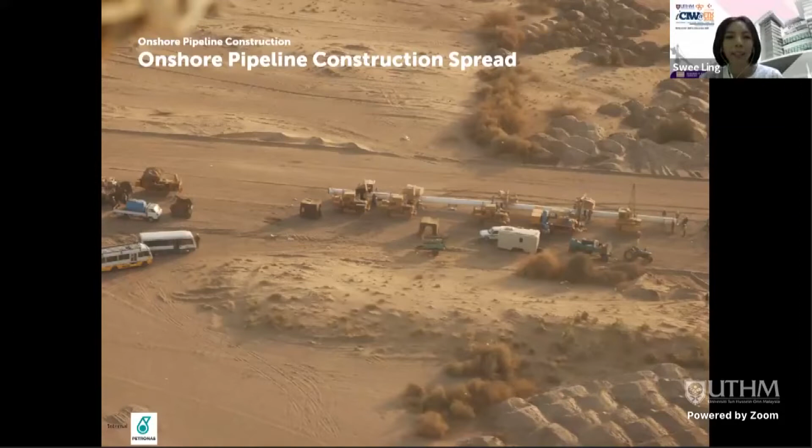Let's go through the construction spread. The typical pipeline spread consists of a few sections, starting with pipeline survey. In order to install a pipeline, we need to conduct a detailed survey on the site so that we will avoid encroachment into private land. If the land does not belong to us, the land acquisition process needs to be started, so the beginning of the activity might take a long time until all land matters are settled, then everything will follow as per plan.

My colleague will go in detail for each activity later. After clearing the site and getting the correct work boundary, we start clearing the site and perform removal of the ground surface, including rock and plants. After that, pipeline will be strung along the right of way, and then welding is done for each location.

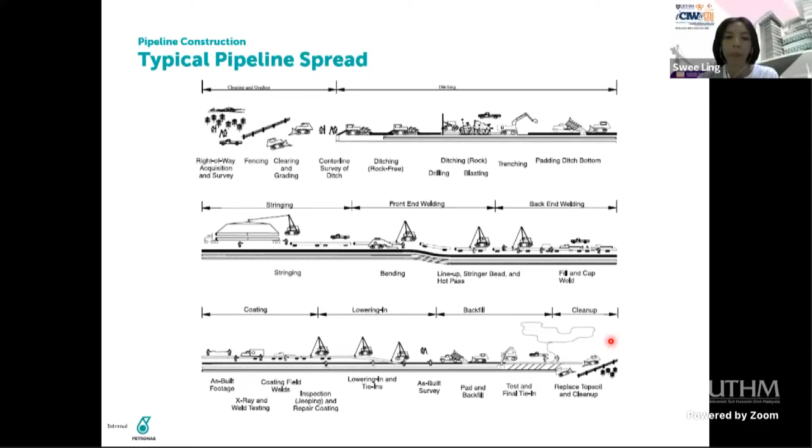This is some of the spread for countryside construction. Countryside is normally straightforward because it does not have much buildings or underground structures that we need to reconsider in the routing of the pipeline, so after clearing the site and installing the pipeline, the reinstatement activity is much easier compared to the urban area.

For countryside areas, most construction is in places with less people. During pipeline installation or design, we need to consider what we call location class with different design information, which affects our design and construction method. Okay, just stop me if there are any questions.

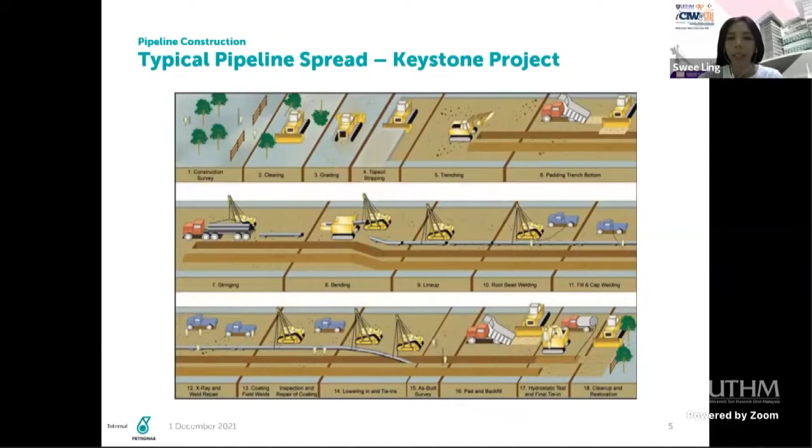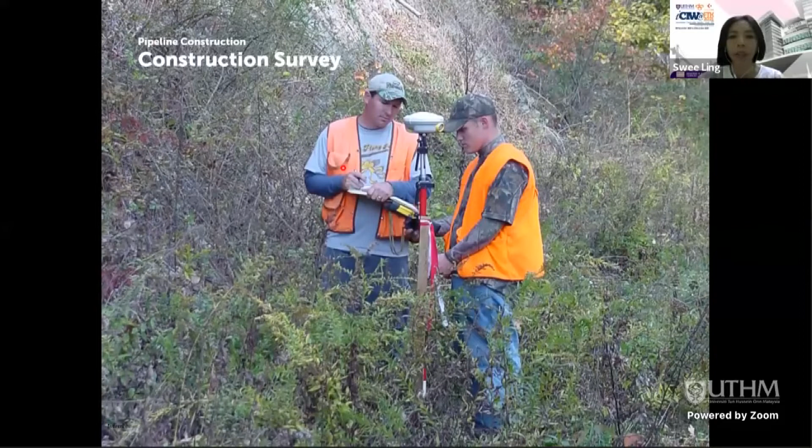I will go to our first activity in pipeline construction, which is to conduct the construction survey. This equipment is very familiar to the civil team, the theodolite, as we studied previously in university. We also use this equipment to conduct leveling. A construction survey is performed to gather detailed information to enable the design team to complete the design of all sections of the pipeline, including the road.

We need to make sure to identify the boundary of the right of way and the work site location. This activity includes brush cutting of the center line and the cross section offset of sufficient width to provide a clear line of sight for the surveyor.

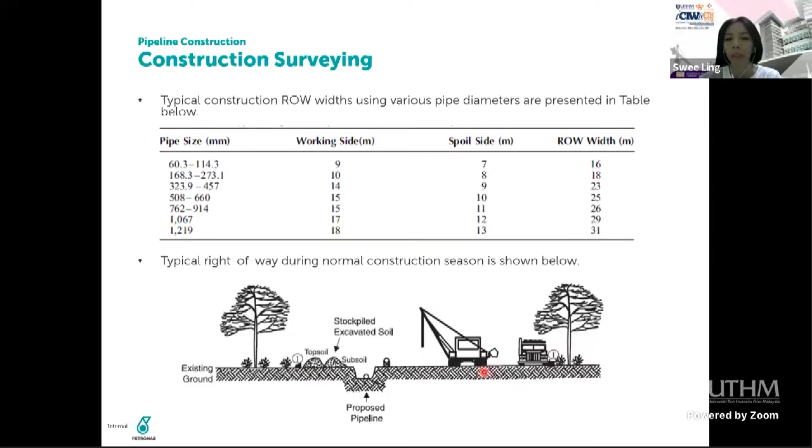So next is about a typical construction right of way width that we adopt during pipeline construction, so that the people performing the construction have clear sight of all activity. From the small picture, at the left side is where we stock the excavated soil, and at the right side is where the activity takes place to perform pipeline stringing and all the welding.

So what is right of way? Right of way is the width, the space of land allocated from the center line of the pipe, so that the operator can perform construction, and then in future when the pipeline is in operation, the operator can perform maintenance and inspection.

The area of the right of way, all the temporary working space, and all the access routes used for construction are completely clear of tree and brush during this phase. Stumps are removed from the ditch line, spoil storage areas, and all areas to be graded. Logs are salvaged wherever possible, and the bulldozer with special attachment cuts or knocks down any remaining material.

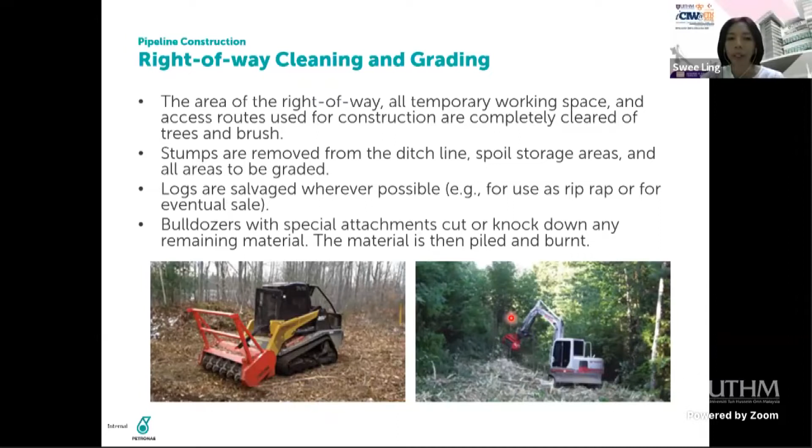After the cleaning and grading activity, the inspection staff will check that the permanent right of way or temporary work area boundaries are clearly marked by the inspector, and that cleaning is confined within these boundaries. The temporary land use agreements are executed prior to cleaning the right of way and comply with each specific provision.

For all those utilities, let's say we perform the installation in an urban area, those exposed utilities will be marked and protected, and we also need to ensure that drainage affected during construction is reinstated and not blocked. Timber, debris, and earth are not placed in the watercourse, and sufficient area is cleared to ensure that slash and debris is not mixed with the ditch or grade spoil, and that spoil is not placed on uncleared ground.

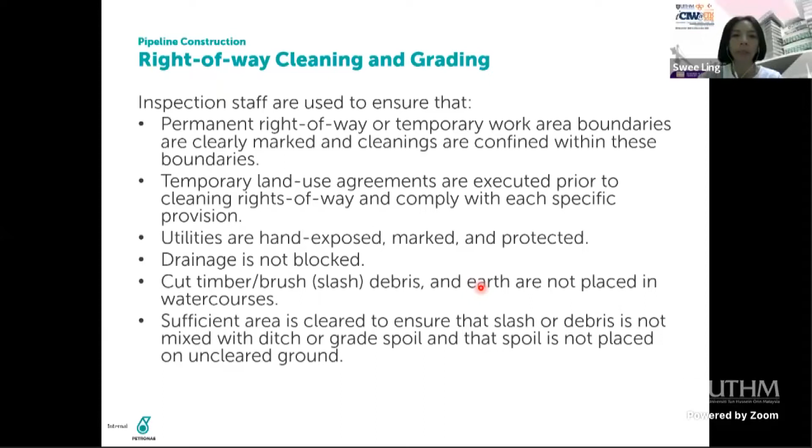That's all for my sharing on the construction survey and the right of way preparations. I would like to pass the slide to my colleague, Puan Salwanie, to continue with the sharing.

All right, thank you, Ms. Ling. So I will proceed on the trenching, pipe stringing, pipe bending, and field joint coatings. Okay, next, Ling.

All right, so we proceed with trenching. Normally the trenching will be excavated using the wheel digger, supplemented by the backhoe to dig the sag bends and areas requiring extra depth. Usually our pipeline is laid along about 100 kilometers, so it would be time consuming if we used manual digging or backhoe. That's why we use the wheel digger to proceed with the trenching activity.

For the spoil from the ditching activity, usually we will stock adjacent to the trench, as shown in the previous slide by Ms. Ling earlier, so that it will ease our activity for backfilling later. The topsoil will be put along the excavated area, and the finished ditching will be to the correct depth and width to suit the pipe diameter. Usually the trench dimensions will vary according to our pipeline diameter or the nature of the terrain where we will lay our pipeline.

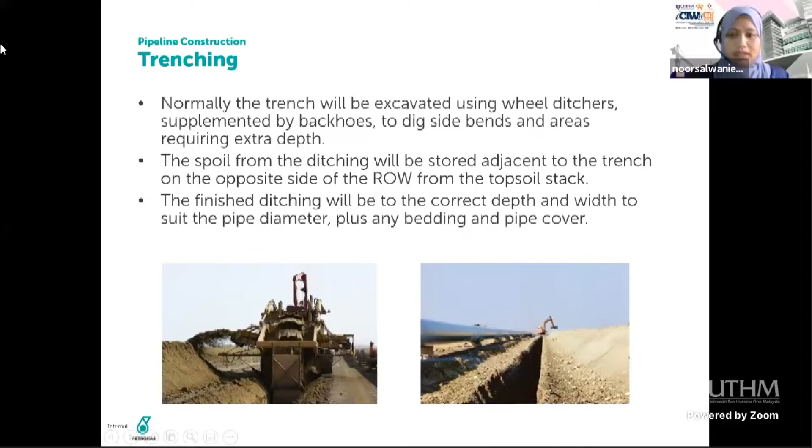Okay, so next. This is, as I mentioned earlier, the trenching equipment. We use trenching machine or the wheel ditcher because it is suitable for long distance and flat terrains, as well as high efficiency rates during construction.

We also use the pipeline padding machine, using the in situ earth that we excavated earlier. After that, we start to remove debris from the excavated soil, and later put it as a coating for additional protection to our pipeline to avoid damage to the coating. This padding is to reduce premature pipeline corrosion and improve pipeline longevity throughout our operation life.

So what does the inspector monitor during the trenching process? We need to ensure correct dimensions, such as the depth mentioned earlier, to avoid contact with other pipelines and intrusion by third parties, as well as ensure spoil is placed separately from topsoil on the strip ground, proper sloping, and hand trenching near buried facilities to avoid potential damage to our utility or pipeline. We also ensure proper alignment of the trench, with gaps or plugs to allow landowner, livestock and wildlife crossing, and ensure drainage is not blocked during construction.

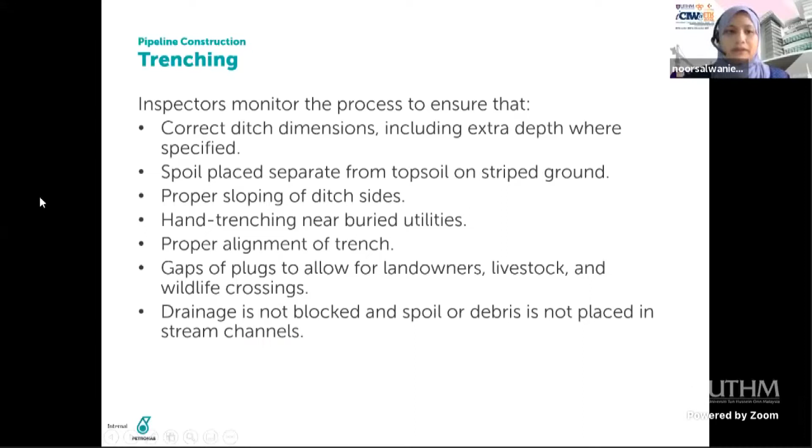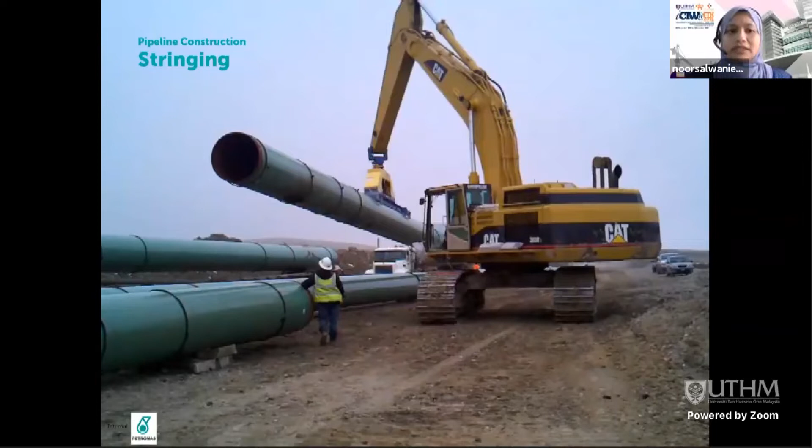After the trenching is completed, the next process is pipeline stringing. So what is pipeline stringing? It's the process where we deliver the line pipe and align it along the excavated trench area.

Upon completion of the trench activity, the line pipe is delivered to the site. We use a crane to lift and load the line pipe from the truck, then align it side by side along the trenches. The pipes are angled slightly to allow the end hooks to be removed and to prevent damage to the bevel, since the bevel will later be used for welding between the line pipes along the trench.

During the stringing process, a site supervisor needs to monitor the site to ensure the pipeline is handled properly so it won't cause damage, so that later we can weld the line pipes to one another perfectly.

We also need to ensure the different pipe wall thickness and grade marking match the alignment sheet, because our onshore pipeline construction is based on class category - for example, class 4 areas with high population density require higher thickness material. So we need to properly align and allocate our line pipe during stringing according to the wall thickness or grade of the pipeline.

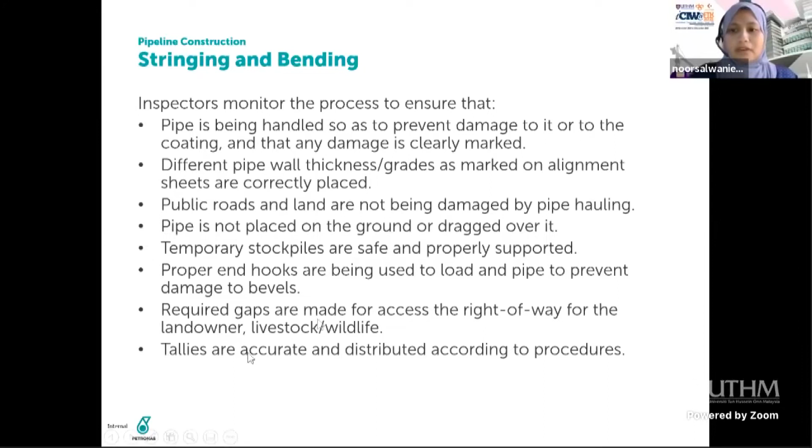After aligning all the pipeline along the trenches, the next process is pipe bending. There are three categories: cold bend, hot induction bend, or elastic bending.

Why do we do pipe bending? Because most of our pipeline route is not straight, due to the nature of the terrain - for example, if we lay pipeline in a mountainous area, there may be elevation changes requiring us to align the pipeline accordingly. Hence we must perform pipe bending so it fits properly into the 3D profile of the trench we excavated earlier.

Usually the pipe joints are welded to one another before we perform the pipe bend. Based on our experience and the projects we've conducted, most pipe bends are done on-site using a cold bending machine.

However, cold bending is not suitable for sharp bends, so it's usually applied at 40 D radius or above. So based on the pipeline construction survey we conducted earlier, if our pipeline route has a sharp bend, for example less than 40 D radius, we will require pipe bending using hot bending.

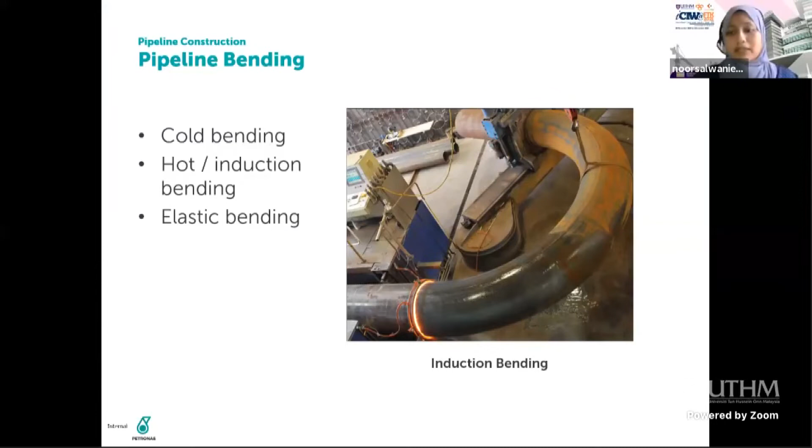The last one is the elastic bend. For any sharp or small bend, or any pipeline bending, we need to follow the requirements as per ASME B31.8 or ASME B31.4.

After we have performed the pipe bending, we align our pipeline at the trenches, weld our pipe together, and perform the pipe bending at the location where it needs to fit as per pipeline alignment. So the next step is the field joint coating.

Field joint coating is for the bare part of the pipeline surrounding the weld area. Usually our line pipe is around 12 meters long for each piece, so we need to join them together to make a long pipeline. The area where we join the line pipe is usually bare metal.

The other part of the pipeline is already coated with multiple types of coating depending on our application. For the areas where we performed welding to connect the line pipe, we apply the field joint coating. This is to reduce corrosion post-construction or during the operation life of our pipeline.

We apply the field joint coating, usually multiple layers of a certain thickness based on our product, to ensure the whole length of our pipeline is fully protected. There are multiple types of field joint coating, for example FBE type, dual layer FBE type, PUF, and SPU. The type we use depends on our application and the intention of the pipeline.

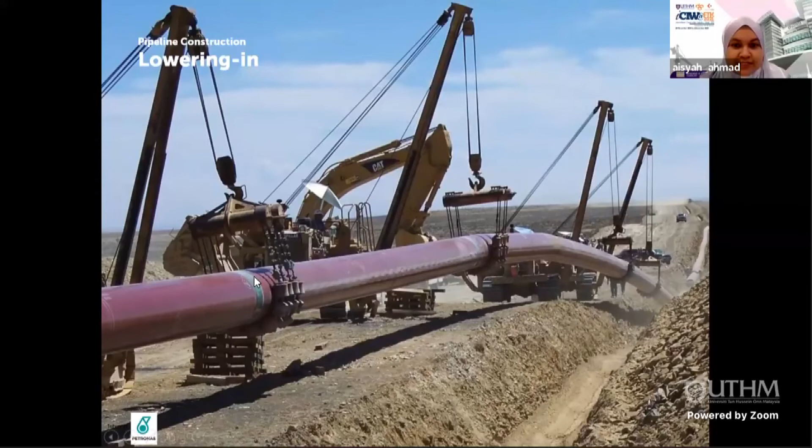As I mentioned, the lowering in activity means we are lowering down the connected pipelines using side booms, with several side booms working together for a smooth process. After lowering it down, we need to ensure our coating is still intact, so we re-inspect it using a holiday detector, and apply repairs if necessary. We use two types of equipment, cradles and belts, for lowering down the pipeline, depending on the length of the section and the terrain.

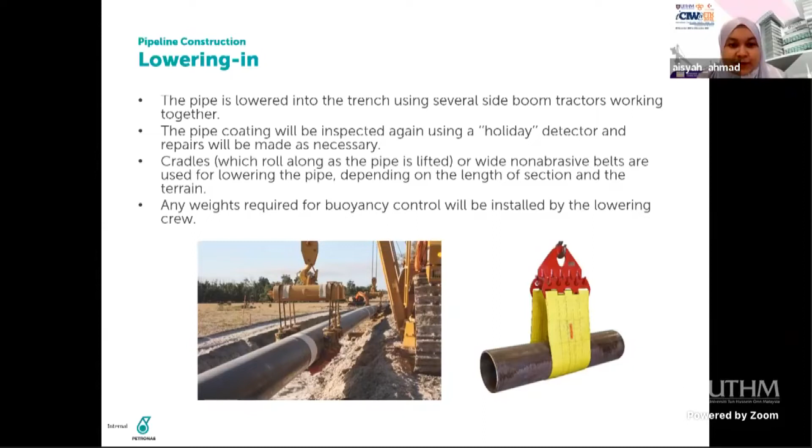Any weights for buoyancy control will be installed by the lowering crew. Sometimes when we have a high water table in that area, we would require buoyancy control measures, such as installing concrete mattress or culverts or something like that. Any weights will be installed during this time after we have inspected the coating condition as well as when we have lowered down the pipeline itself.

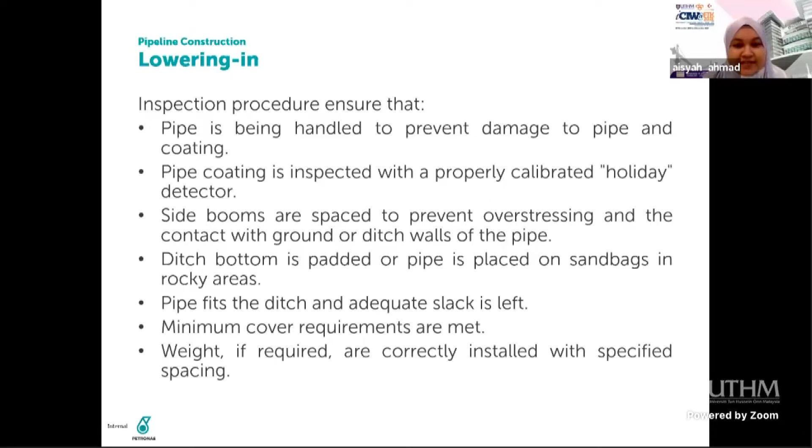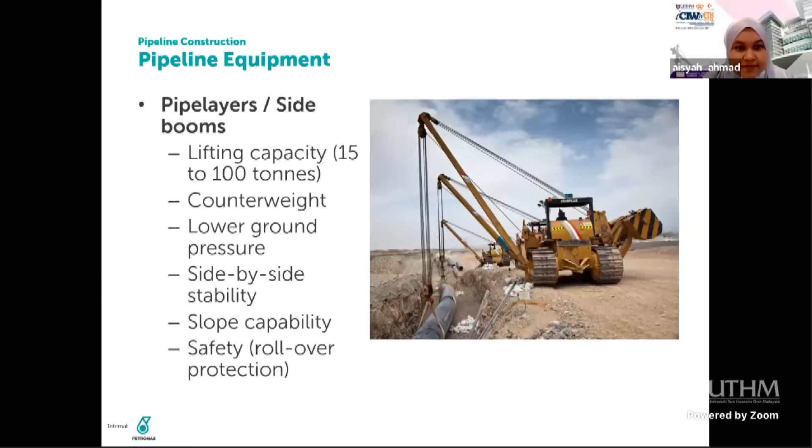The term tie-in means that we are connecting the pipeline into a facility or to another pipeline system, or it could be that we have two construction spreads and we would like to connect the different sections of a single pipeline. So we have some preparatory work, which is quite detailed. We prepare the hole, the bell hole itself, and install the skids to ensure that our trench is stable. We lower down our pipe ends into the trench, supported on the skid itself, then prepare our equipment and pipeline.

Another consideration during the tie-in is that we have a stable location, as well as no water around, in order for us to proceed with the welding activities. So stabilization and dewatering is part of the activities we usually conduct for welding inside the trench.

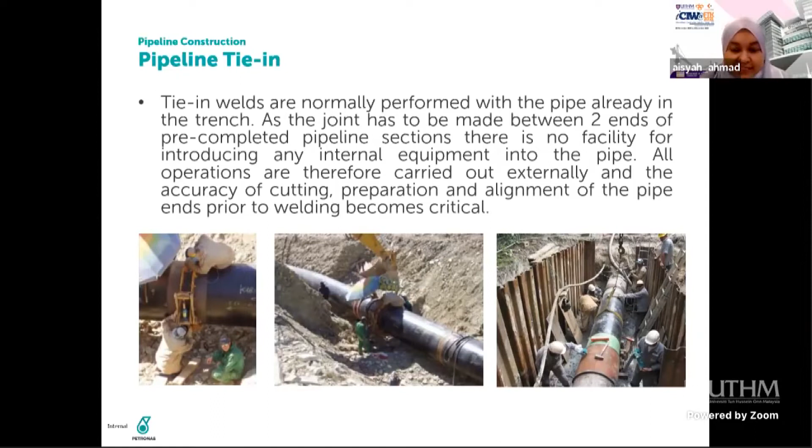The pipeline tie-in inspectors will monitor to ensure that welding is done by qualified welders as per requirement. The pipe is handled to prevent damage to the pipe and coating. This is a common theme throughout our construction activities. Pipe is aligned and welded without excessive force, meaning that sometimes when we put the pipeline inside the trench, we cannot align it together due to obstacles at site or the terrain itself. We need to ensure that the pipeline is aligned. That's where the challenges usually are when constructing the pipeline.

For complete welds, to ensure the welding is okay, we usually use radiography on the completed welds, and we need to ensure there are no defects in the welding, which need to be approved prior to backfilling. All the weld areas are coated. This is where field joint coating activities come in, and we need to ensure the exposed pipeline coating is okay, because external coating is the main protection against external corrosion. For oil and gas pipelines we use carbon steel, which is quite susceptible to corrosion, so we need to ensure the external coating is not damaged even before we use it.

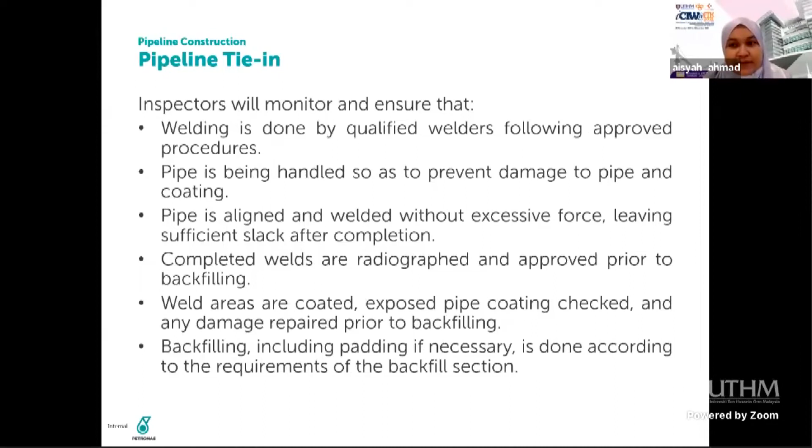We need to ensure there is adequate natural drainage, to ensure there is no damage or water table issues that could lead to geohazard problems later.

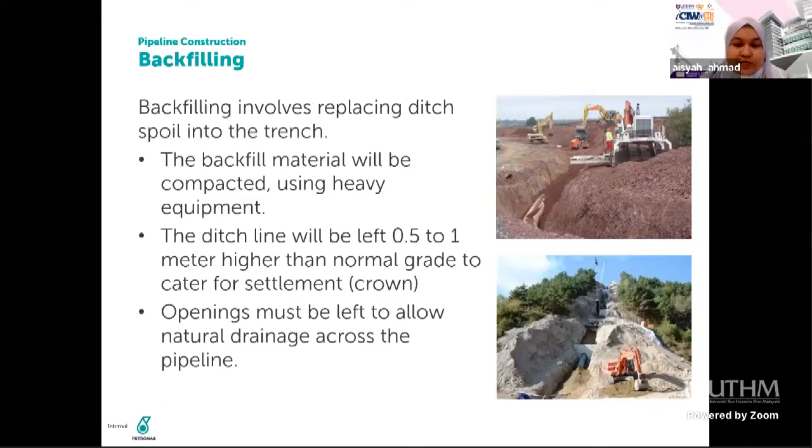Our specification for backfilling, the most common requirement by local authorities, is that we need to restore the excavated area back to the pre-existing condition. That is the minimum requirement, so we need to fulfill the requirements indicated in the plans or specifications, because different authorities have different requirements on backfilling, but usually we understand we need to restore it to the pre-existing condition. The backfilling shall be accomplished using suitable materials, meaning we need to ensure the materials used are not harmful or damaging to the pipeline and its coating.

It is defined as mineral soil reasonably free of materials that may damage the pipe installation, prevent thorough compaction, and increase risk of settlement. We need to carefully place the backfilling materials and ensure a relatively uniform spread all over the pipeline, in order to provide simultaneous support on both sides of the pipeline. All surplus or waste material remaining after completion shall be disposed of as per usual construction methodology.

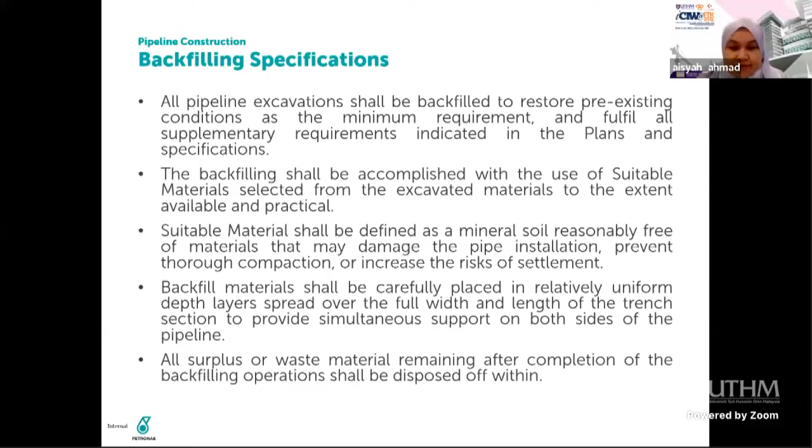Pipeline construction and maintenance is a highly regulated, strictly monitored practice with continuous involvement from federal, state, and local entities, as well as Tennessee Gas engineers and safety experts. The construction process begins with land survey crews marking the construction corridor, center line of the pipeline, utilities, road crossings, and other environmental areas of consideration. The construction corridor will then be cleared and graded to remove brush, trees, roots, and other obstructions such as large rocks and stumps. The corridor will be graded to provide a level surface and safe working area for the pipeline crews to build and install the pipe.

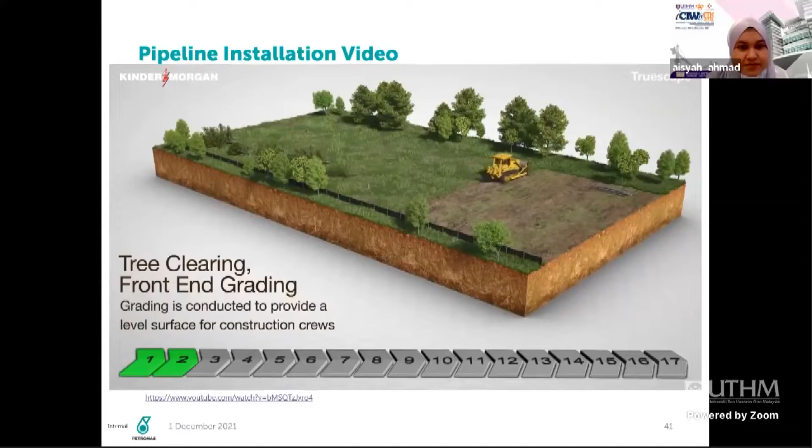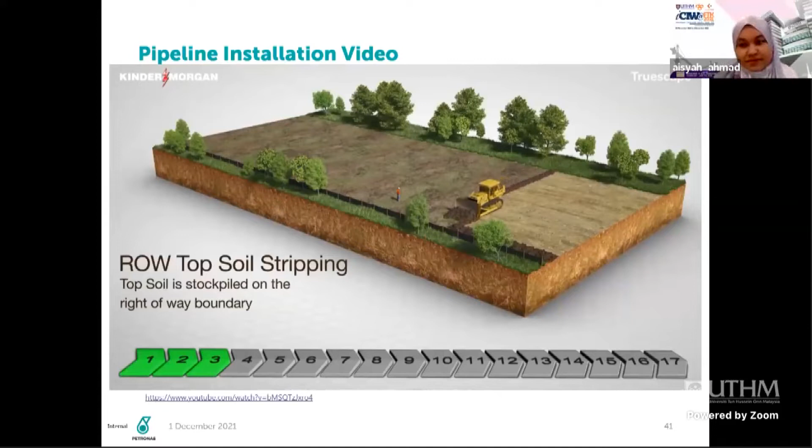The process of grading the corridor may require blasting rock ledge to accomplish a safe working area. The topsoil will be removed and segregated along the working corridor for use during restoration. The center line of the pipeline is then staked in preparation of trenching along the pipeline corridor.

In areas characterized by normal soils, the trench for the pipeline is excavated by crawler-mounted rotary wheel type trenching machines, or track-mounted excavators. The trench width and depth will be in accordance with U.S. DOT regulations. The excavated ditch bottom in areas of rocky soil conditions will be padded with clean soil to protect the pipe coating during installation.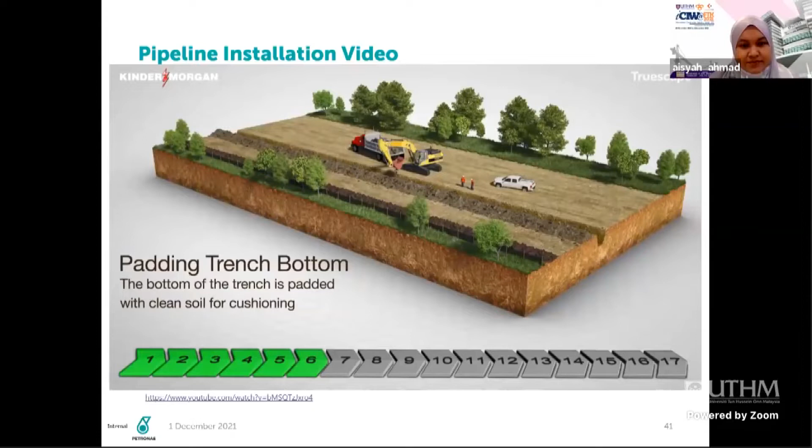Pipe will be delivered to the pipeline storage areas and will be placed along the right-of-way in a continuous line in preparation of welding operations.

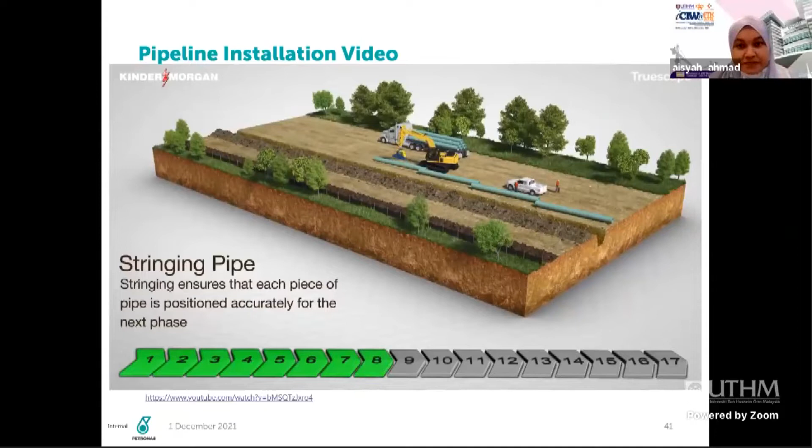Bending of the pipe will be required to allow the pipeline to follow the natural grade changes and direction changes of the right-of-way. Selected joints will be field bent by track-mounted hydraulic bending machines. For larger horizontal changes of direction, manufactured induction bends may be used.

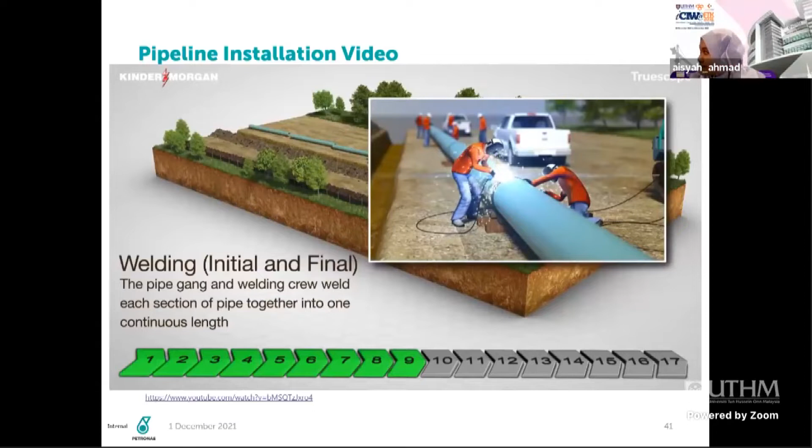Following stringing and bending, the joints of pipe will be placed on temporary supports adjacent to the trench, carefully aligned and welded together by welders qualified according to applicable American National Standards Institute, American Society of Mechanical Engineers, and American Petroleum Institute standards. A Tennessee-approved welding inspector will conduct the welder qualification testing and document all test results.

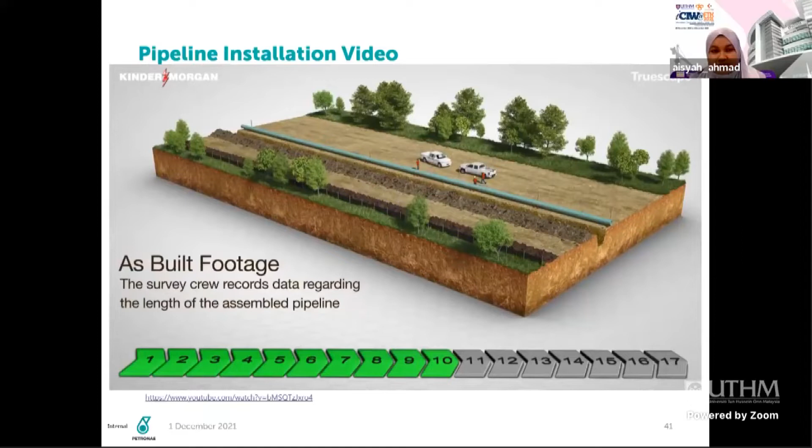The pipeline joint lengths and identification numbers will be recorded. Each deflection angle in the pipe will be documented as part of the pipeline permanent records.

Our projects also leverage the latest in pipeline monitoring and safety technology. For example, we ensure that the assembled pipe meets or exceeds the design strength requirements using X-ray or another approved test method. Electronic equipment is also used to inspect the coating quality and any damage is repaired.

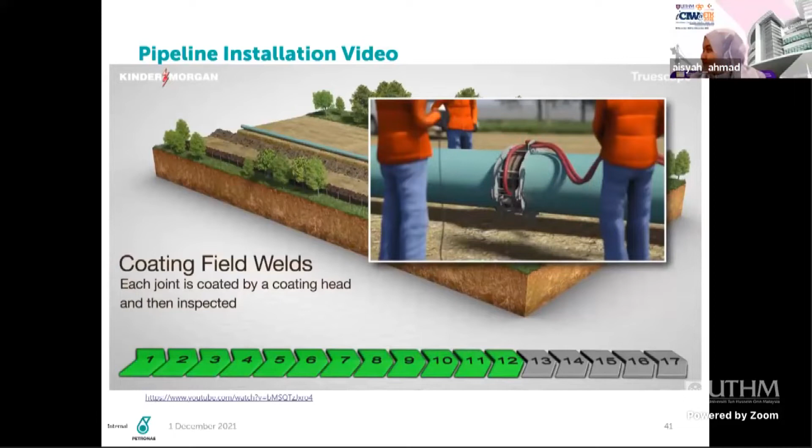Once the pipeline has been welded together, coated, and inspected, the pipe is lowered into the trench.

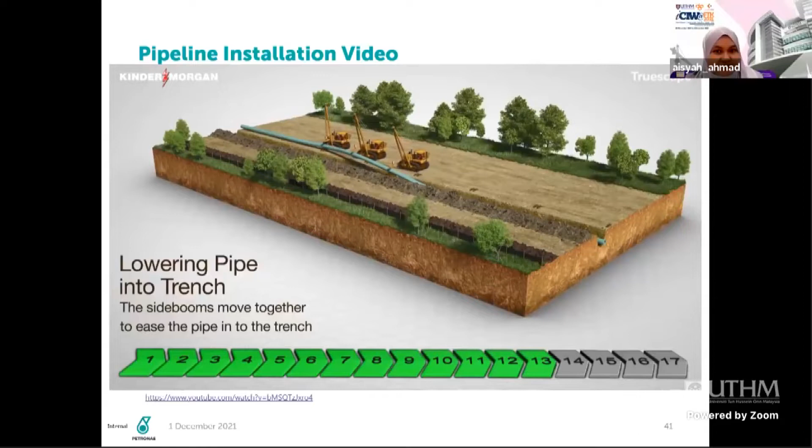Once the pipeline has been lowered into the ditch, the survey crews will document the location of the pipeline using GPS instruments. This will become a permanent record for the life of the pipeline.

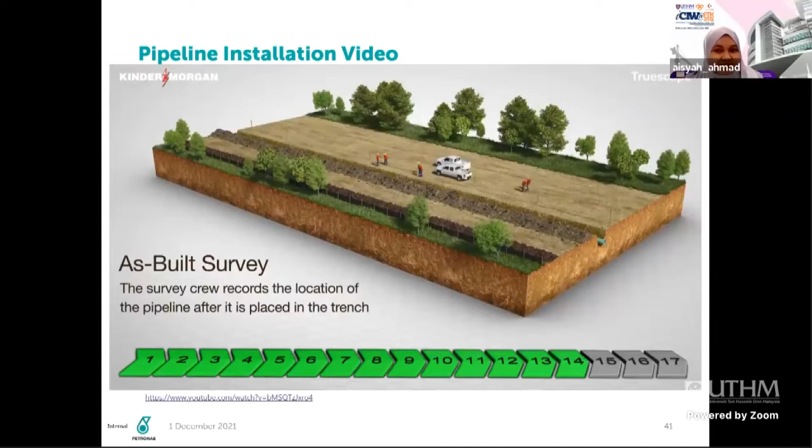The pipe is then padded and backfilled using special material to protect the coating, as well as the material originally excavated from the trench. A soil crown may be placed above the trench to accommodate any future soil settlement.

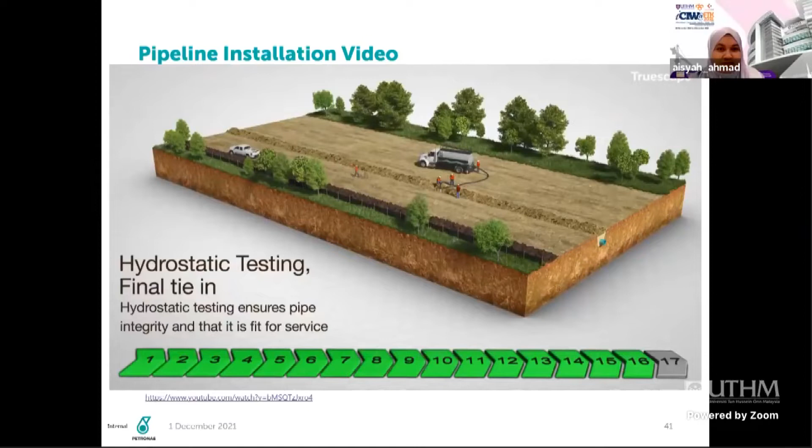Hydrostatic testing involves the pipeline being filled with water and maintained at a test pressure and duration in compliance with applicable federal regulations. Disturbed areas are smoothed out and the area is cleared of remaining construction items.

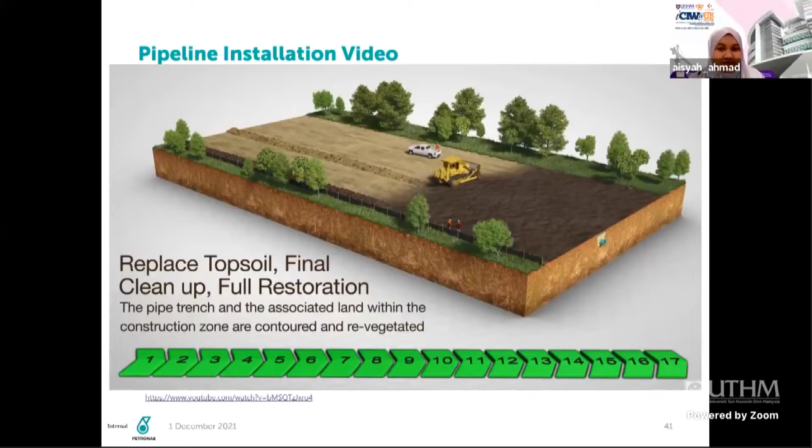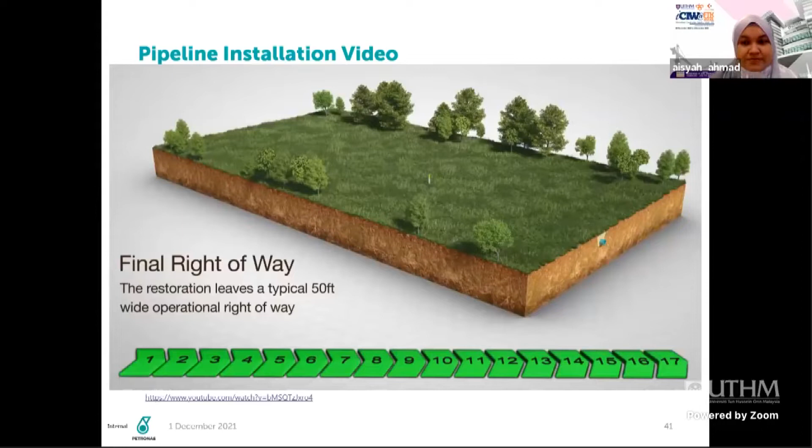Erosion control measures are put in place, including site-specific contouring, permanent slope breakers, mulching, and reseeding or sodding with soil-holding vegetation. Construction sites undergo thorough restoration and every effort is made to leave the area in its original condition, including seeding and replanting based on landowner, community, and agency requirements.

I hope you guys have a better understanding with the video. That is, I would say, the common type of pipeline installation or construction for onshore section.

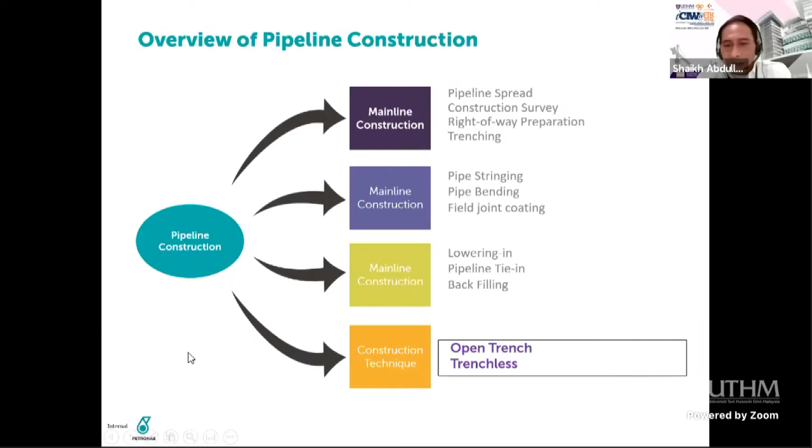Next, you can move to the next slide, Swee. We have two types of the construction techniques, as mentioned by Miss Ling, Puan Salwanie, and also Miss Aisyah. We have open trench and we have trenchless.

When and why we use open trench and trenchless, basically the decision of open trench is coming from the authority. For example, in Malaysia, for road crossing, we have to approach Lembaga Lebuhraya Malaysia, and we also have railway crossing, where we have to approach Keretapi Tanah Melayu.

Also, at the start of this project, for any pipeline project in Malaysia, it is governed by environmental impact assessment. In some cases, open cut is not allowed, so we cannot do any trenching.

Along at specific areas, for example, at mangrove areas, like our latest pipeline project going to Pengerang, crossing the mangrove area, and also river crossings which are quite long, more than 200 meters. Sometimes, during the PGU construction back in 1990s, early or late 90s, we had the Sungai Pahang crossing, about 1.5 kilometers.

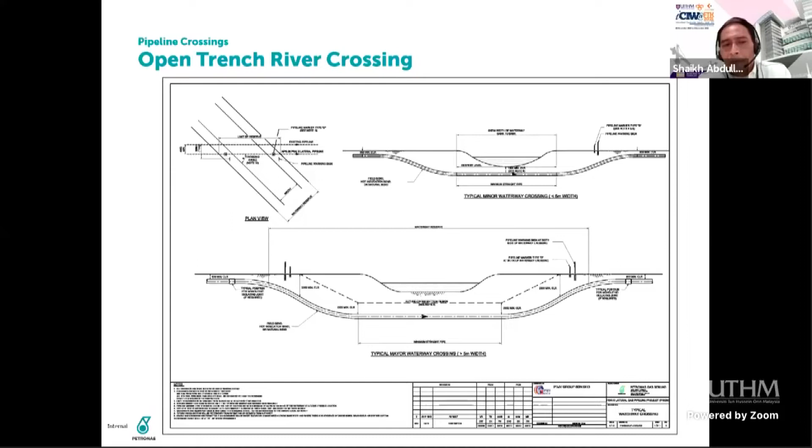Next slide please. Okay, this just shows you the typical open trench method for a small stream. On the left, if the authority has no issue with this construction method, or the river is shallow with no environmental concerns about soil disturbance, our construction equipment can just cross over.

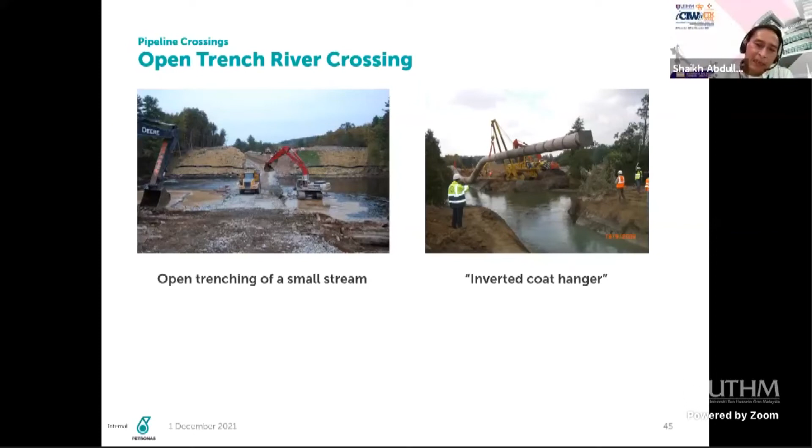On the right, the method is basically how we lower our pipeline at the cross section using this inverted coat hanger. It's like a coat hanger, you pick up the pipeline and just lay it into the river. Next, Ling.

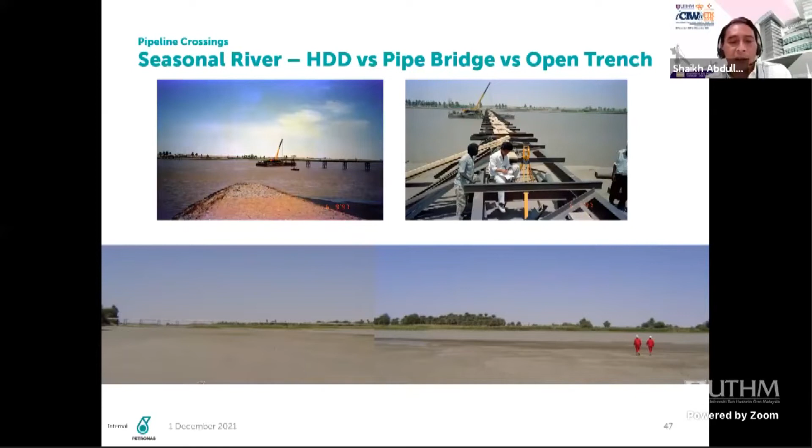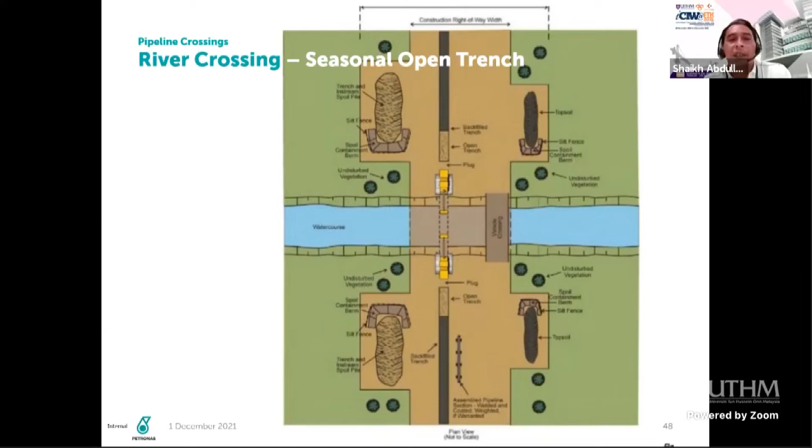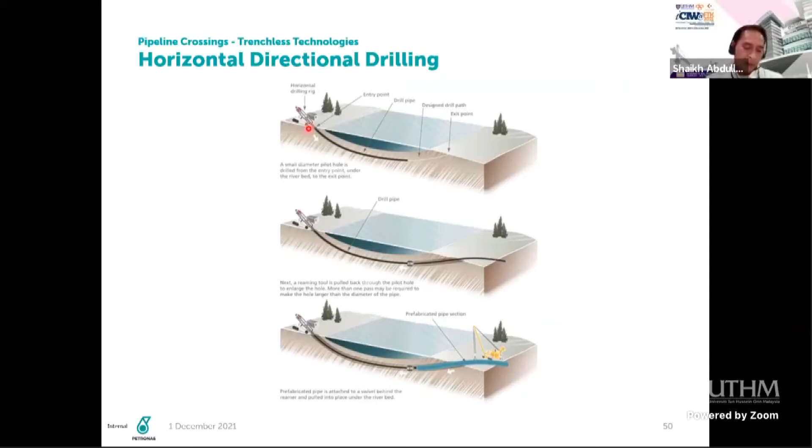Next, I think we have a video to explain this horizontal directional drilling. So enjoy.

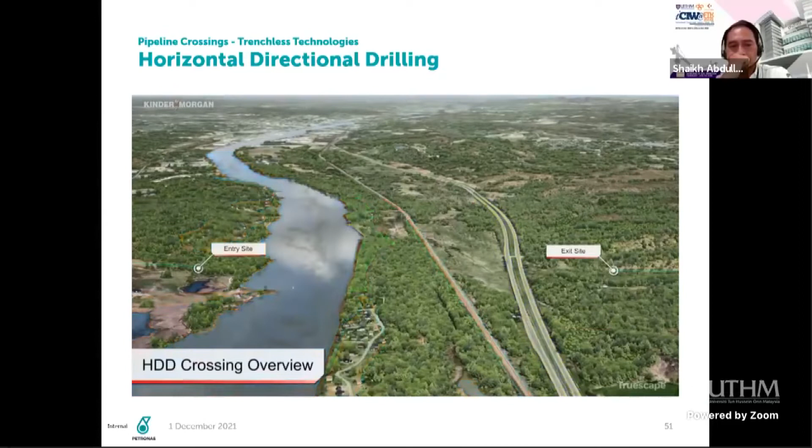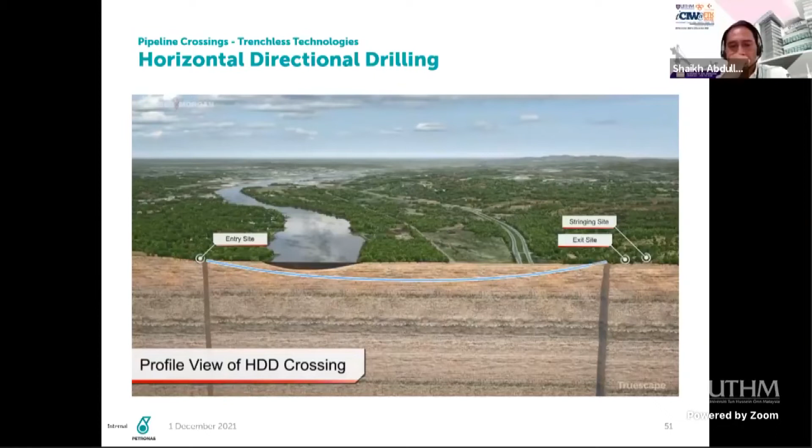Horizontal directional drilling, commonly referred to as HDD, is a surface-to-surface installation technique comprised of 3 primary stages, including pilot bore, reaming, and product pipe installation. This method of construction is typically used to install pipelines in areas not amenable for open-cut construction, including major water bodies, wide or busy highways, railroads, environmentally sensitive areas, and urban environments. During construction, no disruption occurs to any feature being crossed by the HDD installation. With proper design and good HDD construction practices, the HDD method allows for installation of pipelines with no impacts to the crossing features. Limited workspace is established on both sides of the crossing to house the necessary drilling equipment and to facilitate product pipe string fabrication. These sites are cleared and leveled to facilitate drilling operations.

Silt fencing and other erosion control measures are placed around the site. If necessary, sound curtains are erected at the drilling sites for noise mitigation. The drill rig and power unit is placed into position on the drill alignment.

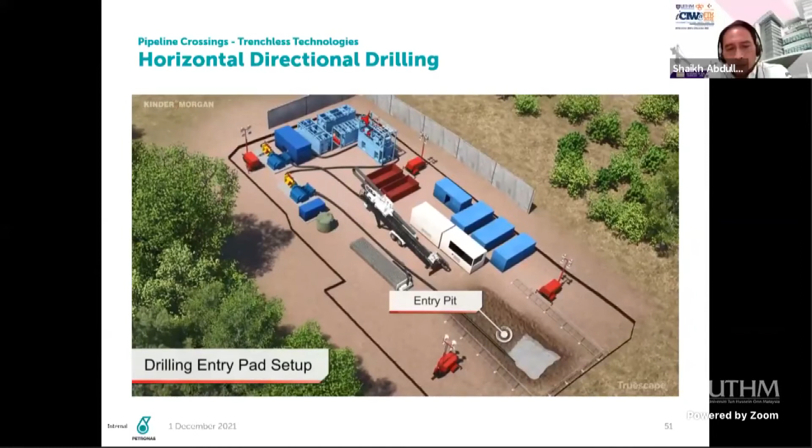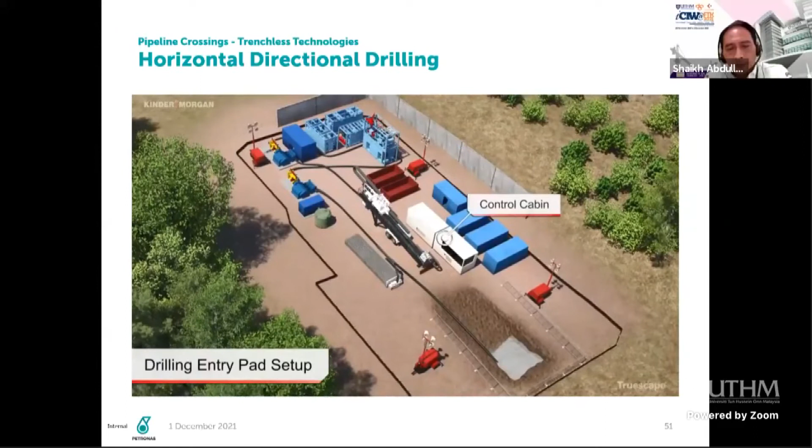A drill pipe skid is positioned next to the drill rig. A small entry pit, approximately 5 to 6 feet deep, is excavated at the front of the drill rig to collect drilling fluid returns. A separation plant, holding tanks, and drilling fluid pumps are set up and plumbed with the drill rig. A control cabin is placed immediately next to the drill rig. This cabin houses the controls used to control the drill rig and track the drill bit location.

Drilling of the pilot bore commences by pushing and rotating drill pipe connected to the drill bit along a predetermined path from the drill rig entry location towards the exit side located on the far side of the crossing.

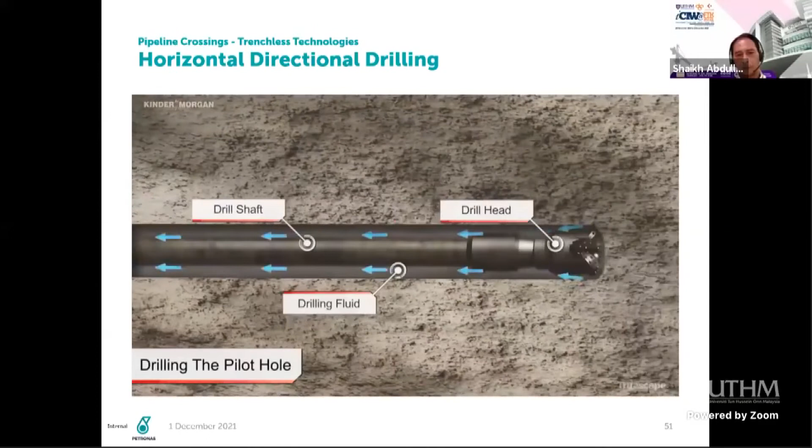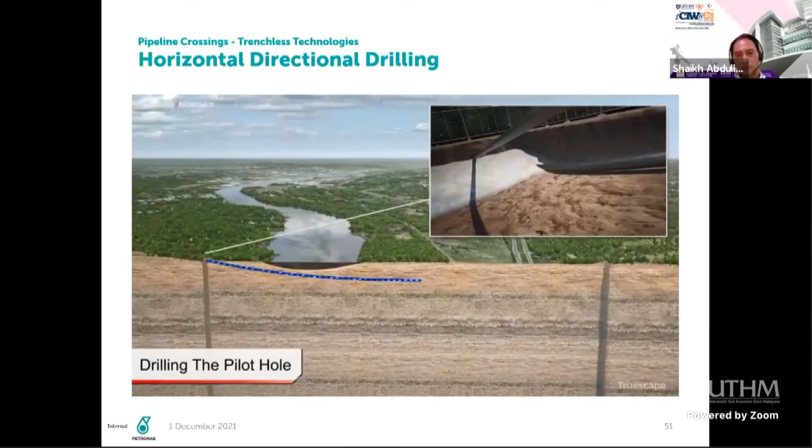A mixture of water and bentonite clay, referred to as drilling fluids, is continuously pumped through the drill pipe to the cutting tools where it mixes with the soil or bedrock cuttings. This mixture flows back to the drill rig location, carrying the entrained cuttings, where it is transferred to a separation plant to remove the cuttings and recycle the fluid component for reuse downhole. Aside from assisting in removal of cuttings, the drilling fluids also serve to stabilize the bore, cool the cutting tools, and lubricate the pipe string.

As the pilot bore is advanced, a tracking system is used to locate the position and orientation of the drill bit. Steering adjustments are completed by the drill rig operator to maintain the design alignment. When the drill bit exits the ground surface on the far side of the crossing, the pilot bore stage of the installation process is complete.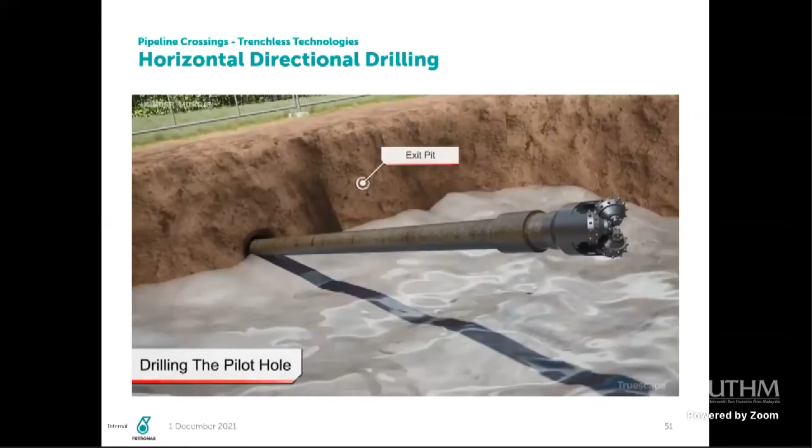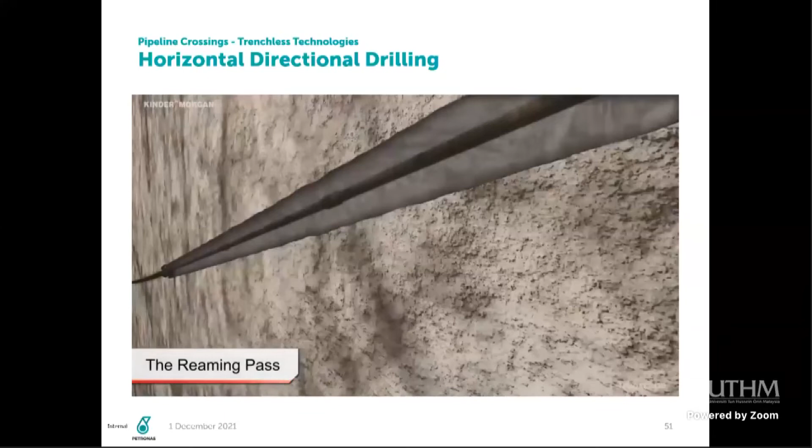The pilot bore is typically enlarged by pulling reaming tools of successively larger diameter from the exit location back towards the drill rig location. Depending upon the diameter of the product pipe, multiple passes with reamers of increasing diameter may be required to incrementally enlarge the pilot bore to its final diameter.

Upon completion of the full reaming passes, the condition of the HDD bore is assessed by completing what is known as a swab pass. The pass consists of pushing or pulling a slightly smaller diameter reamer through the fully reamed bore from start to finish. The diameter of the swab pass is typically smaller than the full reamed diameter, but greater than the diameter of the product pipe to be installed.

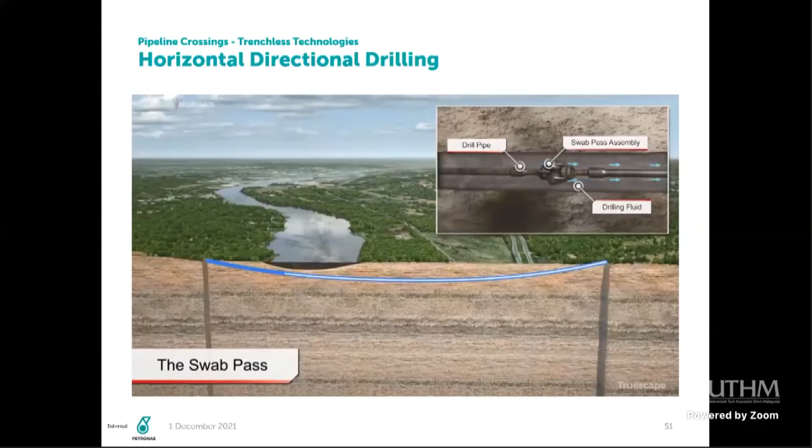Like the pilot bore drilling process, drilling fluids are continuously pumped through the drill pipe to the cutting tools, where it mixes and entrains the soil or bedrock cuttings into the fluid. This fluid aids in removal of the cuttings, continues to stabilize the bore, cool the cutting tools, and lubricates the pipe string.

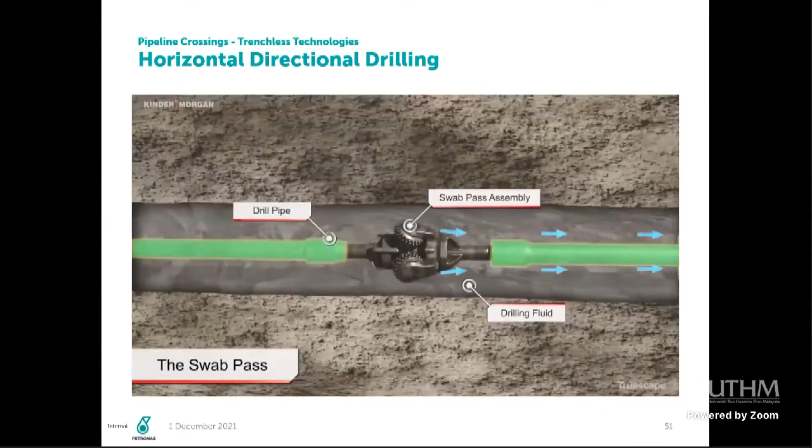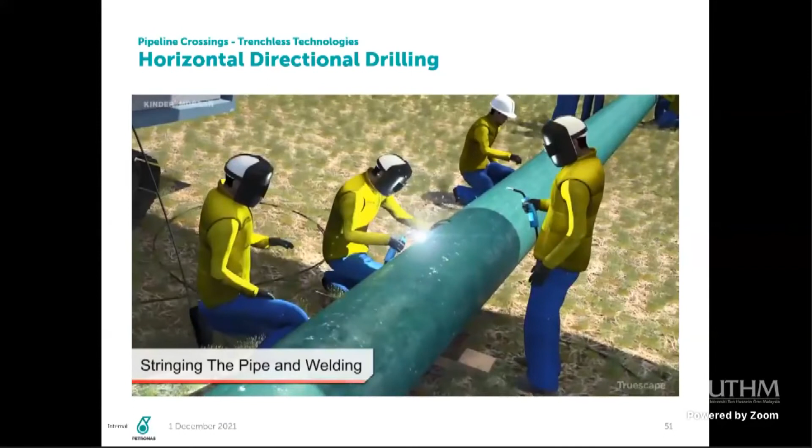Sections of product pipe are transported and positioned at the HDD exit location. The pipe sections are then welded together to form a completed pipe string. Coatings are applied to welds and tests are completed to ensure proper coating application. The product pipe string is then pressure tested with water, drained, and placed on pipe rollers.

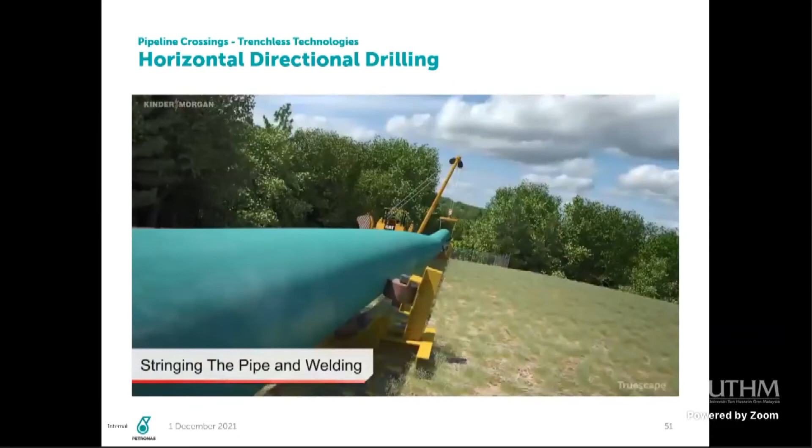Pipe rollers and cranes, or side booms, are used to assist the pullback process. The rollers and slings used in conjunction with the lifting equipment not only provide support for the fully fabricated pipe string, but also help reduce the amount of friction acting on the section of pipe above ground, reducing the overall amount of force required to pull the product pipe into the bore.

The rollers and equipment are also used to position the product pipe to match the angle of the bore where the pipe enters the ground surface.

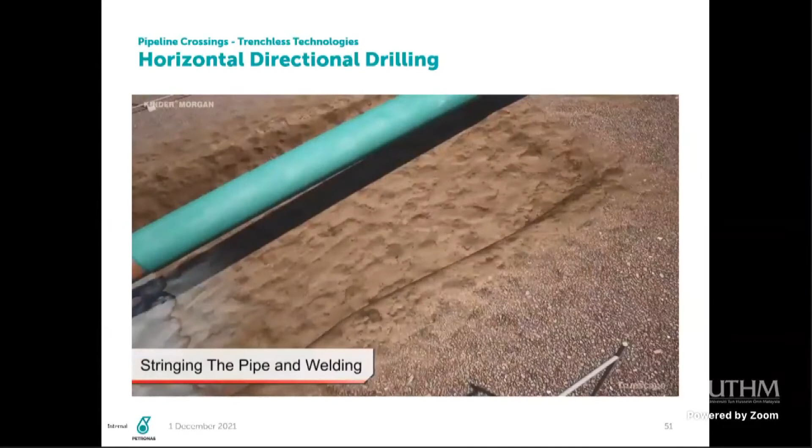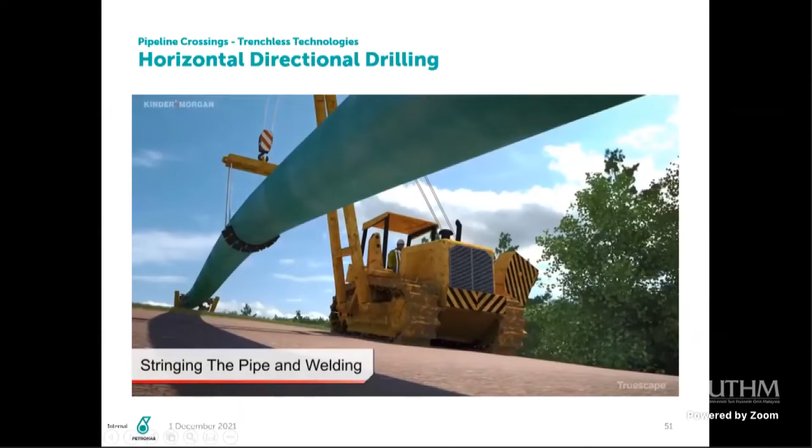Upon completion of the reaming process, and once the product pipe string is completely fabricated and welds X-rayed and coated, the final stage of the installation process, pullback, can begin. The pullback process consists of pulling the fabricated product pipe from the pipe entry location towards the drill rig. The HDD installation is complete when the product pipe reaches the drill rig location.

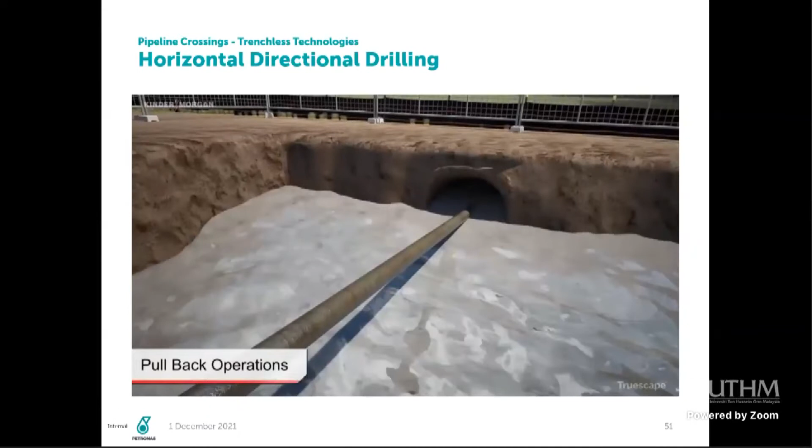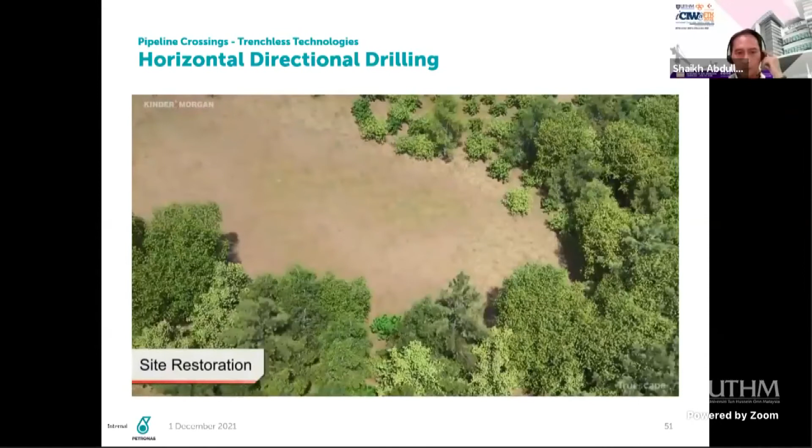Final checks and surveys are completed on the installed product pipe. With the completion of the pullback operations, the drilling equipment is demobilized and the work sites are restored to pre-existing conditions.

Okay, that is actually how this HDD was performed. Most of our samples were taken from the Kinder Morgan pipeline, which runs from Canada to Texas, if I'm not mistaken. This pipeline is a bit controversial because it was designed during the Trump era and completed towards the end of it.

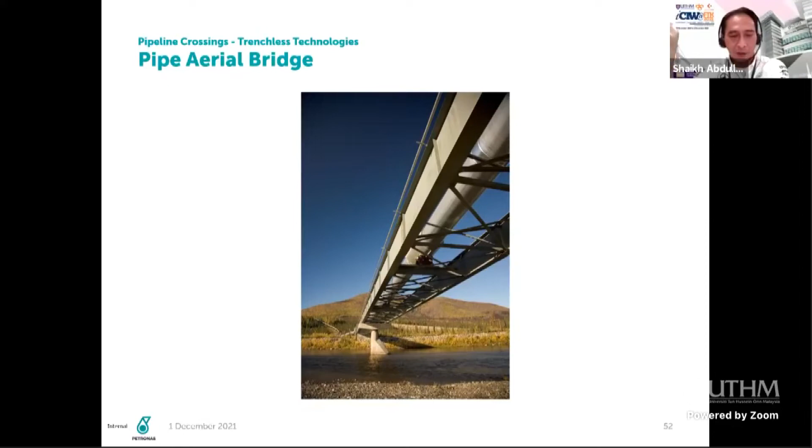This is the typical method of a pipe bridge, not from a civil point of view. The construction is simple: you install the bridge, then install the pipeline on top of it. The size from one end to the other depends on the total weight of the pipeline, which is the dead weight, and you also need to consider live loads due to wind or other environmental factors.

Then for hilly construction, as mentioned by my colleague, we have the temporary trench plug, which we normally install to prevent the compacted subsoil from being disturbed, since trenching already disturbs the area. Even though it's compacted according to our procedures, during the rainy season it may be exposed to soil liquefaction or erosion. This is especially important at hilly sides, which are the weakest points where the soil can become liquid and flow, potentially affecting the safety of our pipeline. So we install a soft plug using styrofoam or bentonite or similar hard material.